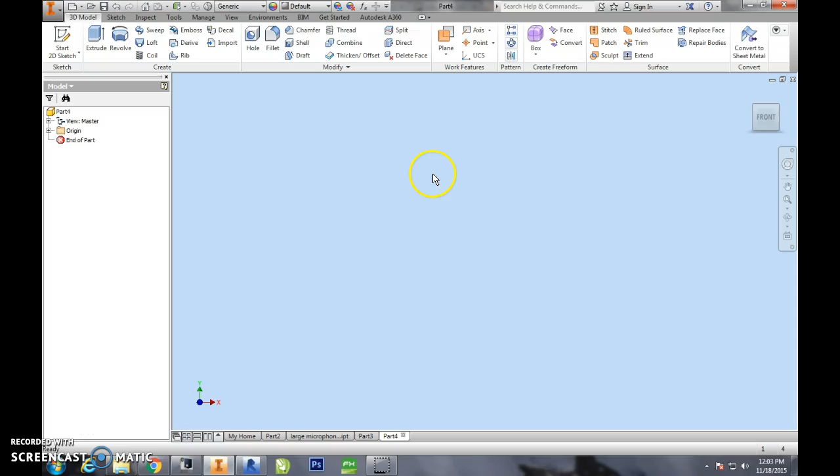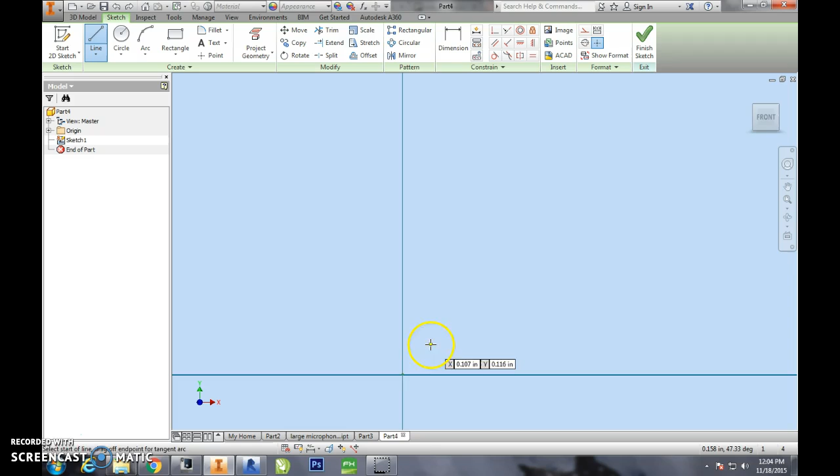Okay, so upper die center pin is going to be a revolve. So we're going to start that off on a sketch, and this is going to be our axis. This axis I'm drawing is going to be the total length of this shape, which is 3 inches. Oops, I was off center a little. 3 inches, okay.

Now, this top part is going to be the radius of the main body. The main body shows a diameter of 0.4375, and I'm going to divide that by 2 to get our radius.

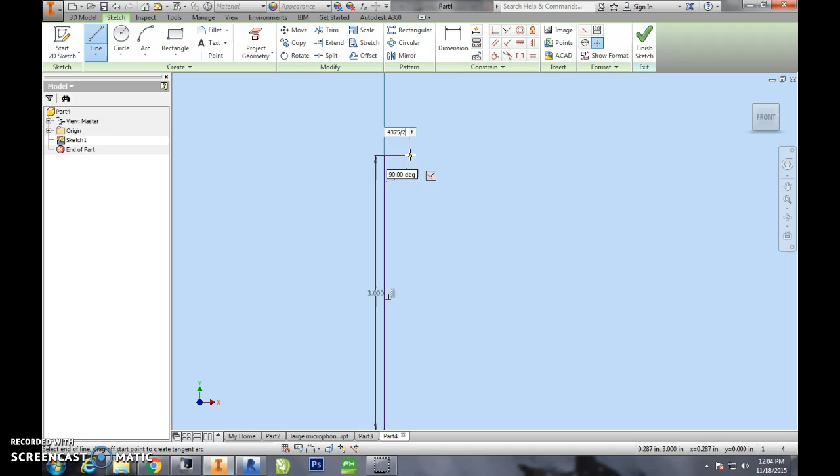Next thing I do, I'm going to come down and make that groove. If you look at it, you can see a little groove in it, and that groove comes down 0.125 first, and then you can see it goes back in. You're not sure what that distance is, so we're just going to put this in somewhere like this, and we'll dimension it here in a second.

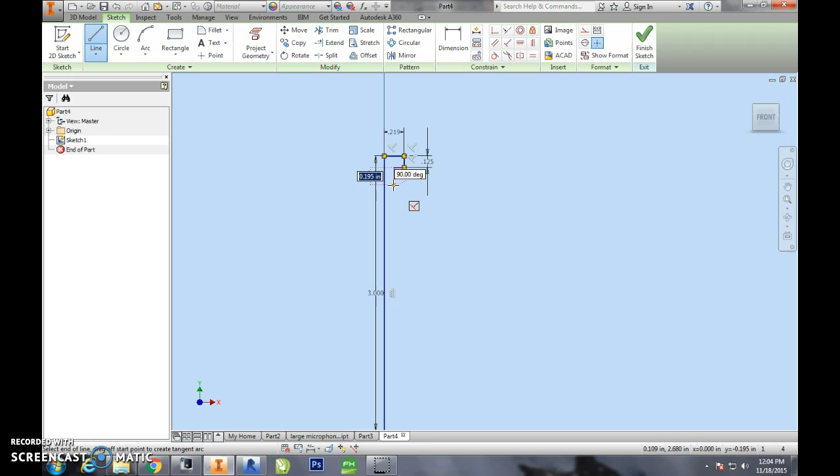This next part goes down, and that is 0.1875 from up here. So I'm going to dimension this, and I'm going to go from here to here, and that is 0.1875. Okay, and then the other thing we had to dimension was this.

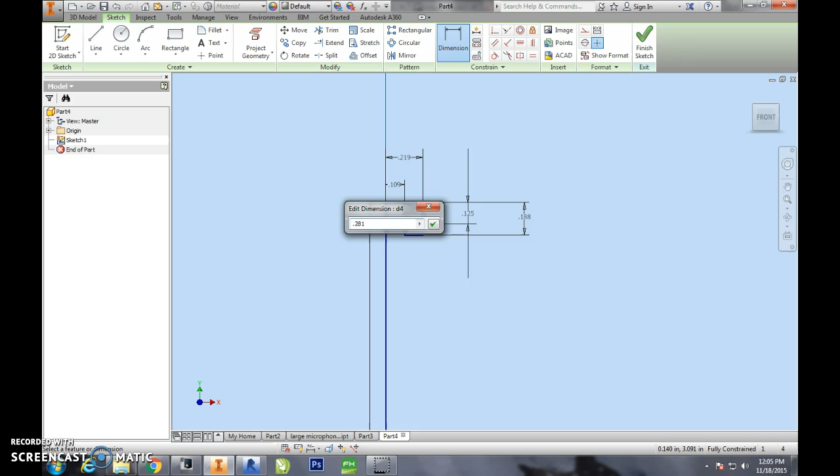This is that groove, so very important here. This is going to be half of that diameter. And you can kind of see to the left of that little shape of the upper die center pin, it has a diameter of 0.281. We're working in a slice of it since we're going to revolve, so we need to divide that by 2.

Okay, now we have our little groove. The rest of this then is pretty much just continuing this down for the rest of the length of this pin. So I'm going to click here, and I'm going to bring this down. Then I'm going to finish that off.

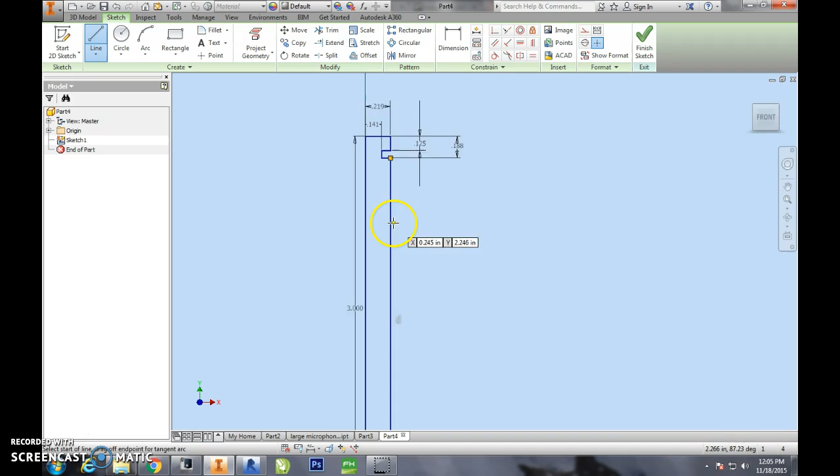Okay, and just to verify to make sure this is the right size. This dimension. Cool, yep, so that shows it was over constrained, which means it's locked into being the same size.

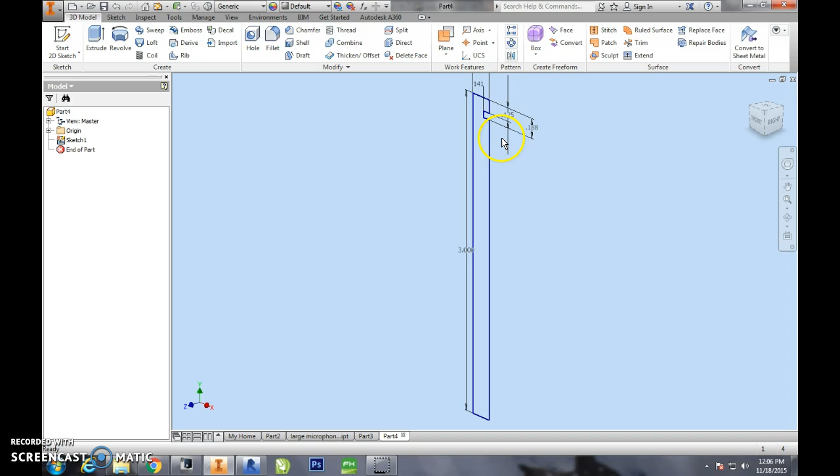Here's where it gets fun. I finished this sketch. Now again, think of this as like a slice of pie of that upper die center pin. Instead of extruding this, I'm going to revolve. Okay, so I've revolved. This is my profile.

Now I have to choose my axis. I can tell that I have my axis selected because it's kind of like a blue color. I choose that inner axis, and now you can see I've revolved this.

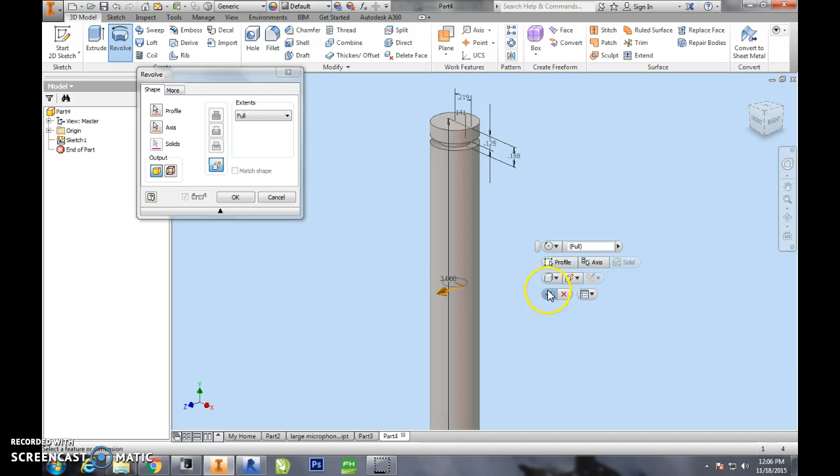Okay, after that, now we are getting into a chamfer. So it says both ends are chamfered 0.03. Oops, 0.03 here as well as here. Okay, next thing I have is a hole in the bottom.

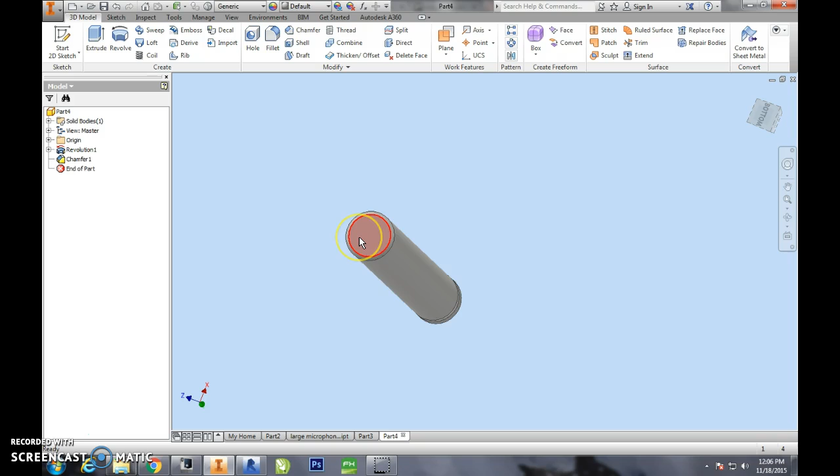So I'm going to right click on this bottom and make a new sketch, place a point, finish sketch. Okay, now we're creating our hole. So I go to my hole feature, and this hole says 1/4 UNC.

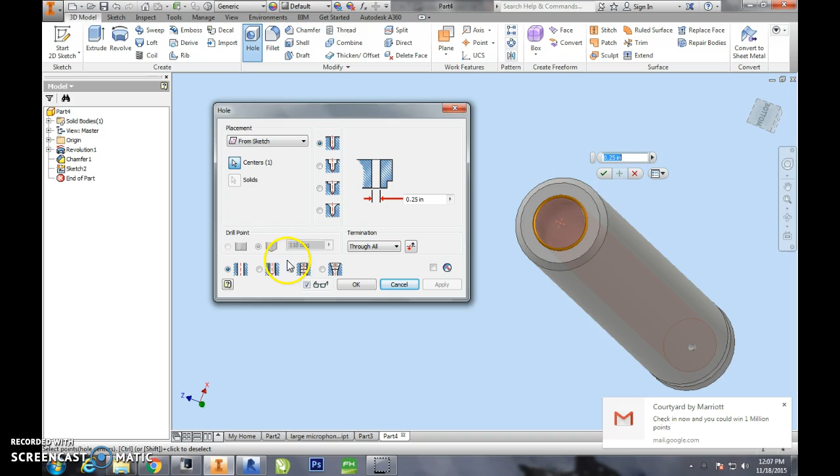That means it's going to be threaded. So I'm going to click right here, 1/4 UNC. Yep, I'm pretty good. Now the depth, it shows I have a depth of 1 inch, so termination, distance 1. Hit OK, and there's our part. We just need to change it to the material it's supposed to be, and we're good.